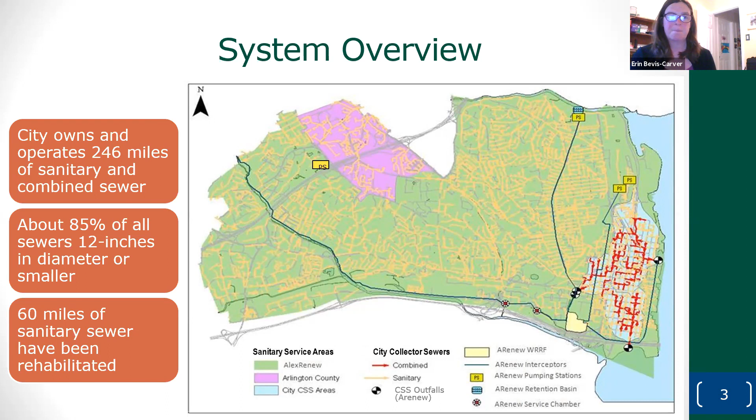I'll also talk about how we do our growth forecasts. Our growth forecasts are really the meat of how we assess the impacts of growth on our sanitary sewer system. These growth forecasts are prepared by planning and zoning—we work very closely with them, and they take growth and put it into different categories that we translate into sewage flows. I can go over the categories briefly.

They are basically long-range planning documents that usually cover a 20 to 30-year period. And then site plans will come in from these plans. So that makes up a lot of the growth between now and the next 30 years.

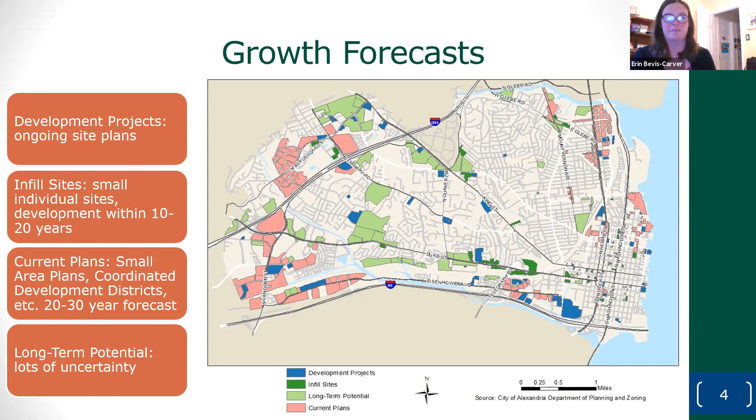So we look at that in terms of our collection system, the interceptor system. Obviously those are done in coordination with AlexRenew and also with Fairfax County, and then with our treatment needs. So I'll talk about wastewater treatment first.

What we do is take those growth forecasts, along with information about existing flows, to see what impact growth will have on our treatment needs. And what we find is, very similar to the last master plan, we don't think we need additional capacity at Arlington County's plant, but at AlexRenew, in the AlexRenew sewer service area, we are seeing a need of close to 4 MGD. That probably around the timeframe of 2040 is where we're going to hit our existing allocation.

So what we have to do as a city is continue to work with AlexRenew to see what are some of the alternatives. There are obviously alternatives such as reducing infiltration and inflow in the system, but also what else can be done -- is something like wastewater treatment expansion even possible at AlexRenew, which is very urban, and is there potentially capacity that Fairfax may not need at AlexRenew? So those are the things we identify in the plan and need to evaluate jointly moving forward.

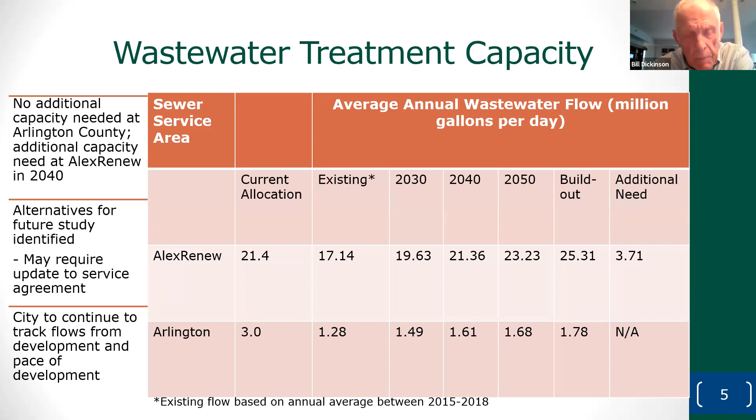Yes, looking at this chart, it's very interesting. If I look down on the map, the next one, where you showed the Upper Holmes Run improvement, the section that is really Fairfax County, that lower quadrant down there, does planning and zoning also look at what Fairfax County's projections are as far as development? There seems to be a lot of development going on down on Richmond Highway, and that flows into our system right now. I don't know, just thinking about the other plants they have in Fairfax County, whether or not they can be reasonably diverted to Fairfax County plants.

So I will say this modeling, this interjurisdictional modeling that AlexRenew is kind of taking the lead on, but the city and Fairfax, we're all working on this together. We have provided our growth forecast as part of that modeling, and Fairfax has provided their growth forecast as well. So it does include that.

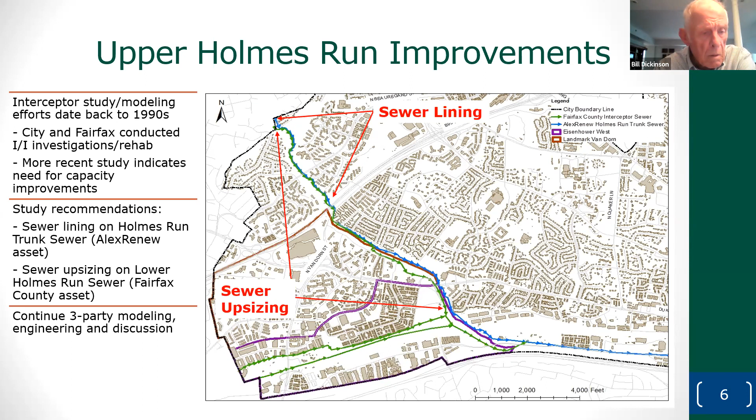Right, and Bill, they're capped by their service agreement at 32.4 MGD, and we have a letter from them saying they will need no additional capacity in our system. Thank you. Bruce? Did you have a question? No, I don't. Okay, thank you.

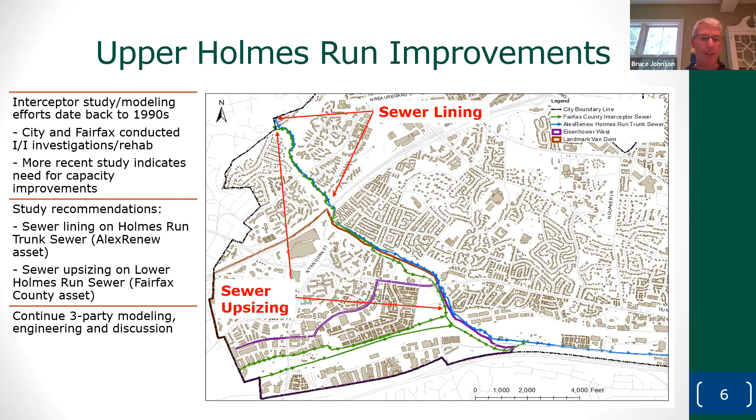Okay, and then the other interceptor I wanted to talk about was Potomac Yard. Of course, Virginia Tech is breaking ground on their innovation campus in North Potomac Yard, and along with that comes a lot of new sewer infrastructure, including the Innovation District pumping station and the associated force main.

Of course, within Potomac Yard, the developer is responsible for building all this new infrastructure, but it will be turned over to AlexRenew to own and operate once constructed. And I know AlexRenew is sitting closely at the table with them during the design process and now the construction process as that pumping station breaks ground.

And so a lot of this is being done in two separate phases, with the Virginia Tech campus and some of the other buildings around there coming first, and then some of the other improvements are going to be done as part of phase 2, which I think is, I forget exactly when, but probably late 2020s to early 2030s.

And the only thing that, and this involved a lot of negotiation with the developer, that the developer is not responsible for constructing, is if there's a proposed relief sewer on the lower part of the trunk sewer that the city will be responsible for, at least from a financial standpoint, from a funding standpoint. And that's because it's outside of Potomac Yard, and there are flows from other areas that will flow into this sewer.

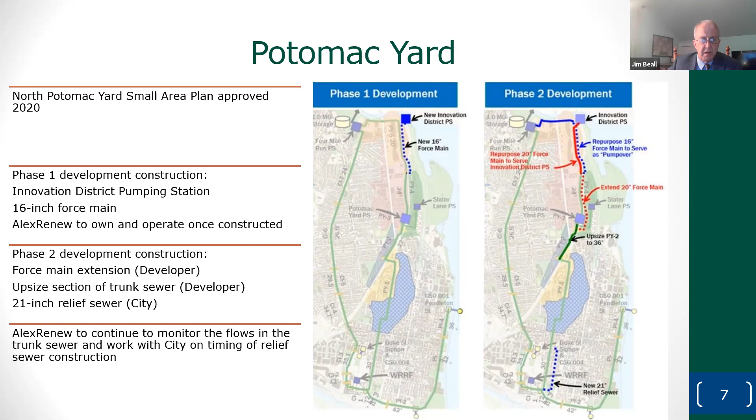And then finally, I want to talk a little bit about collection system capacity. Back around 2010, the city had a lot of small area plans that were up and coming. Beauregard was up and coming, there was discussions about Landmark Mall, Eisenhower West, a lot of development that was going to be happening primarily on the West End. There were concerns that we did not know what the impact of all that development was going to be on our collection system. So the city embarked on developing a collection system model.

And what we actually found is that there is, for the most part, sufficient capacity in this system, but we have identified a number of sewers that will need to be upsized. The interesting thing is it's not all growth driven.

Now, if it is growth driven, a good example is Beauregard. There is existing system capacity today, and site plans have been coming in, and we have been requiring developers to make capacity improvements, specifically along the mainline sewer that runs along North Beauregard. So anything that's growth related is required to be built by the developers, that's not borne by the existing customers.

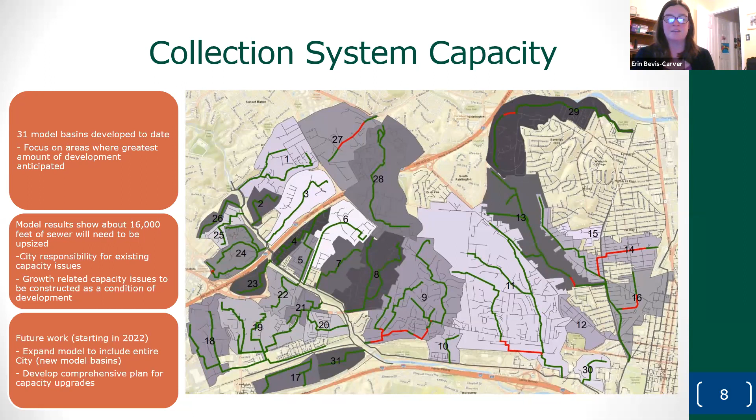There may be opportunities to do some capacity improvements. So I guess I'll go ahead and jump into talking about infiltration and inflow.

And I know Karen has shown this previously as well. I think of infiltration and inflow this way: inflow is kind of direct flow, immediate flow into the sewer system. Infiltration takes a little bit longer to get into the system. It can happen during a wet weather event or after one.

But I kind of think of it collectively, from two different categories: the public side and the private side. The public side being inflow into manholes or infiltration into broken or cracked pipe. And on the private side, we have direct stormwater connections, such as a downspout or roof leader, or breaks and cracks in the sewer laterals.

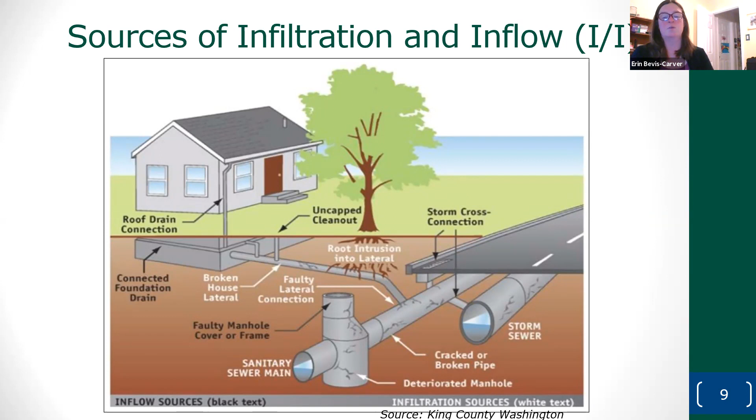We did a lot of flow monitoring back in the 90s in studies that the city worked on jointly with Fairfax and AlexRenew, and the city said we're going to address I&I. But the decision was made not to address private I&I, to address public I&I — that the city would do its part on the system first.

This next slide shows the work that's been done to date. We started by doing a lot of flow monitoring to determine the order of where we would spend our efforts, looking at how much peak wet weather flow there was, similar to that graph Karen showed of flow coming into the pumping station. We looked at where we were having our highest peak wet weather flow compared to our typical average dry weather flow.

We started in the 4 Mile Run shed, which had our highest I&I, and moved from areas of high I&I to low I&I. There was a threshold set — if we found we didn't really have very much I&I, we didn't focus on those areas. So we didn't do the entire city.

We started in 4 Mile Run, did pre-construction and post-construction flow monitoring, and rehabilitated about 60 miles of sewer — I don't have a good graphic for this, I should put something together. In 4 Mile Run and Commonwealth, about a third of the sewers were rehabilitated, so two-thirds were not — that third was out of the 60 miles total.

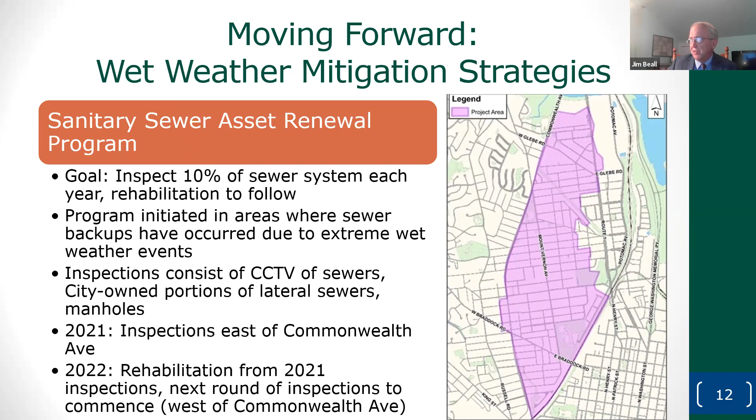Erin, I think this is great data, it's a fascinating presentation. I'm looking at slide 10 and 11. In slide 10, you've got basically the two areas you did I&I work first, Delray and Rosemont, the pink and the purple, and it's almost a direct overlay between that and where the wet weather sewer backups are occurring. It seems like the repairs you did, the lining back 15 years ago, should still be in good shape. Do you have any kind of feel for what else may be going on that's causing the backups?

We do. I think there's a few different things - several things. One is we only rehabbed about 30%, about a third, of the system back then. We think what we're seeing with our CCTV is that those sewers we didn't rehab then are starting to show signs of deterioration and cracks, so those need to be rehabbed.

We talked about this a little bit earlier about city-owned laterals versus privately owned laterals. We didn't inspect laterals before - we're doing that now. That's another source of I&I that we haven't addressed previously. So that's part of it, I think, as well.

And then I think the other two issues are the private I&I. One of the things we did in the early 2000s, when we did the initial CCTV and inspections and manhole inspections, we also did drainage surveys. We actually walked along the outside of the home and saw, hey, that downspout looks like it may be connected to the sanitary sewer system, or that driveway drain may be connected. We followed up with dye testing of those, so we have a bit of a catalog of where some of these private connections are.

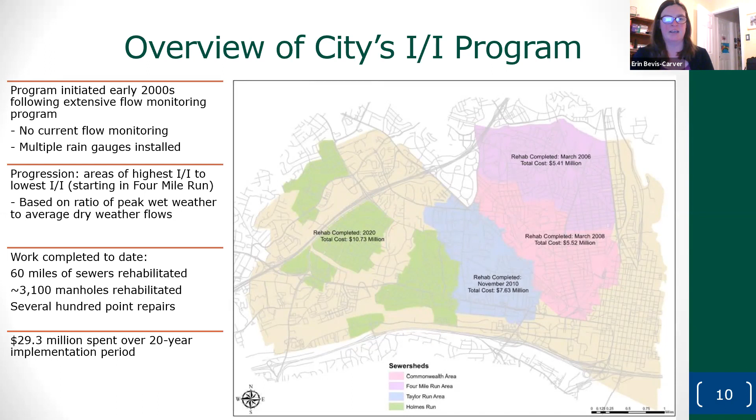So I think there's that piece as well, because we can try to get out as much of the I&I as we can. But the stormwater is going to take the path of least resistance. We can seal up our pipes, we can try to address some of these private I&I connections, but it's a stormwater issue as well. That's kind of what I'm trying to get at.

Along with the asset renewal program, we have some other wet weather mitigation strategies. Now, some of these are maybe aimed at I&I, but others are aimed at trying to reduce sewer backups from occurring, knowing that I&I tends to be something you kind of do over a long term.

So at least I'll start at the bottom. We are trying to develop a private I&I program framework. We are looking at these storms, and what we know about what we've collected over the years with respect to private property I&I, to kind of really, it'll be an estimate at best, but see what kind of impact several hundred downspouts might make in the system. So we're doing that engineering assessment, that analytical assessment, now.

But we're also looking at what other communities are doing. Private I&I is not just a city issue. There are programs all over the country. A lot of times communities do it because they have a consent decree against them to address I&I, because of things like sanitary sewer overflows, because it's hard and expensive work to try to address private I&I. But we are looking at some of these other programs, and at our own city code, trying to come up with a framework that we can bring to city management to consider, so that we can potentially implement a private I&I program in the future.

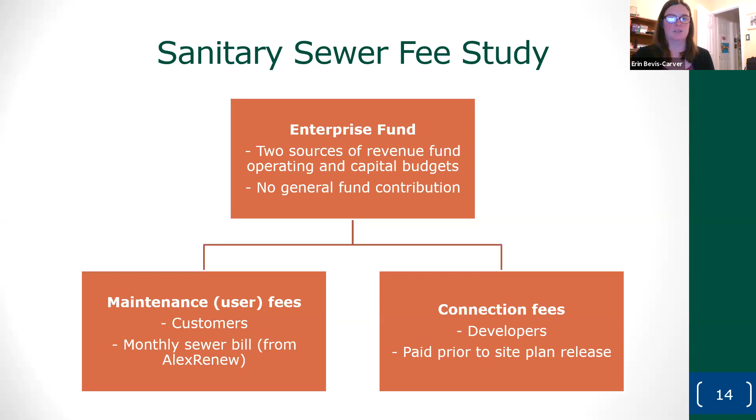So there are two sources of revenue: our customers, who pay a fee on the monthly sewer bill, and fees that we charge towards developers. We do look at those fees as part of our master plan efforts.

I'll start with the master plan recommendation. With our current sewer user fee or sewer maintenance fee, we currently bill on a water consumption basis. This is different from how AlexRenew bills—they use a winter average, which is pretty typical of most jurisdictions because it more accurately reflects the flows in the sewer system itself. This has been something the city has gone back and forth on.

So I think we are finally coming around to making this recommendation. First and foremost, I think it shows consistency. A lot of people have called AlexRenew staff asking why they're charged for 4,000 gallons for wastewater treatment, but charged based on 5,000 gallons for the city. It doesn't make sense, and you try to explain it's just two different bases for those fees. But at this point, we're on board and looking to make that change, proposing to implement it July 1st of next year based on our fiscal year and fee update schedule. That gives lots of time to get everything done behind the scenes.

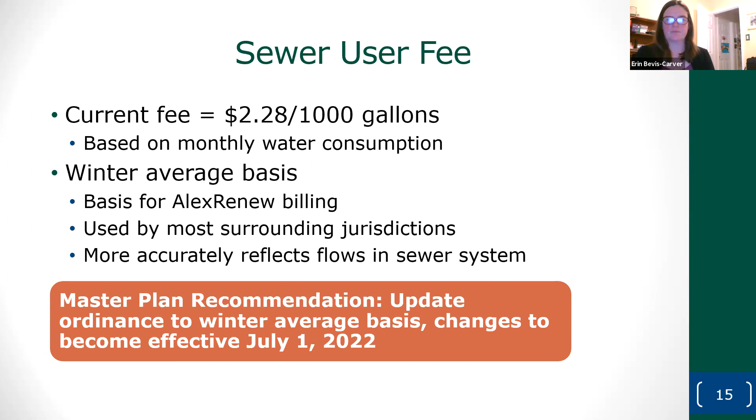We used to not have a tear down credit, but when we did the 2013 master plan, we decided to establish a credit and made it 50%. We're just going that next extra step. We do find though that we'll be charging a little bit more on the commercial side. And senior living's been kind of a hot topic because there are all kinds of different types of senior living, and based on our code, is this a commercial facility or a residential facility? So we're essentially doing what we did with hotels back in the 2013 master plan, making it its own category.